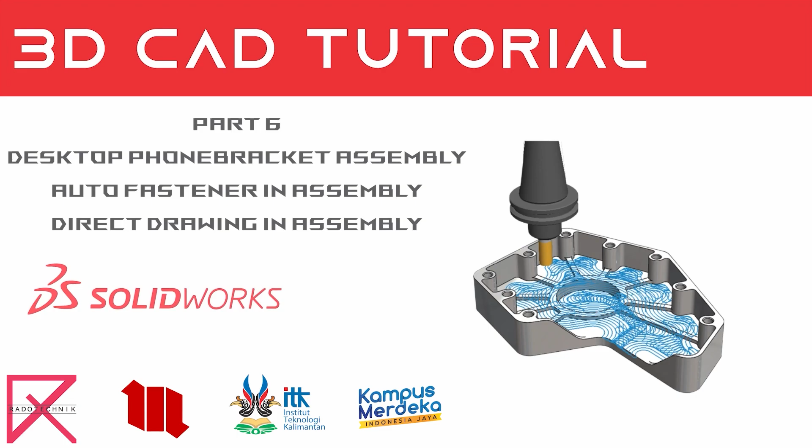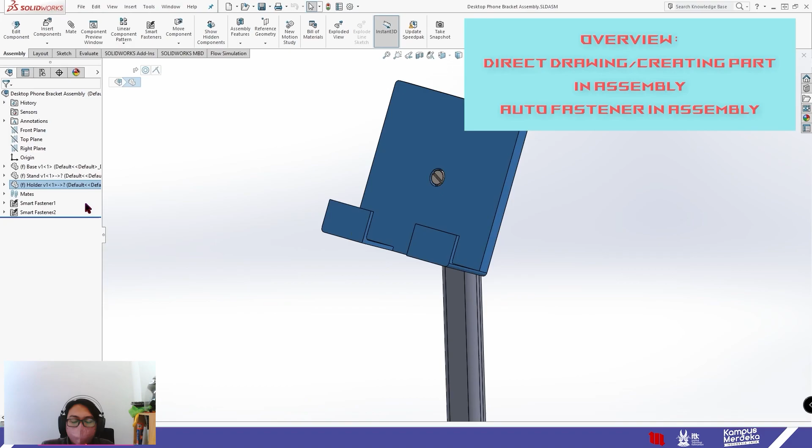Hello, this video is a continuation of our last part. We have created the base, and we need to create the last two parts: the stand here, and the holder on top. We add some bolts or screws using the fastener features—this is the top bolt or screw, and this is the bottom bolt or screw.

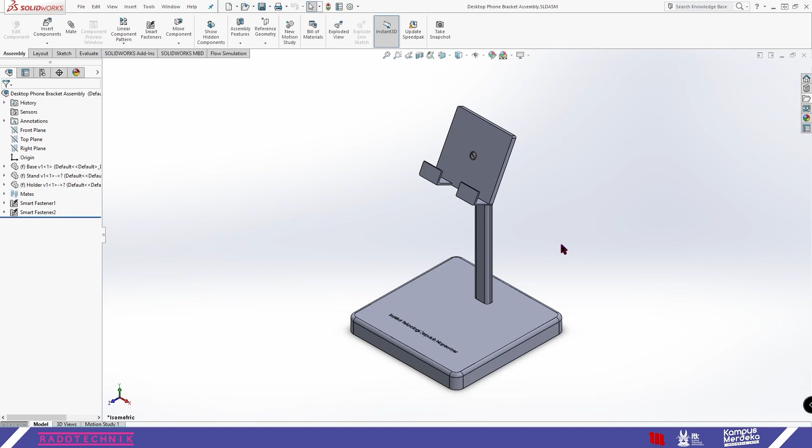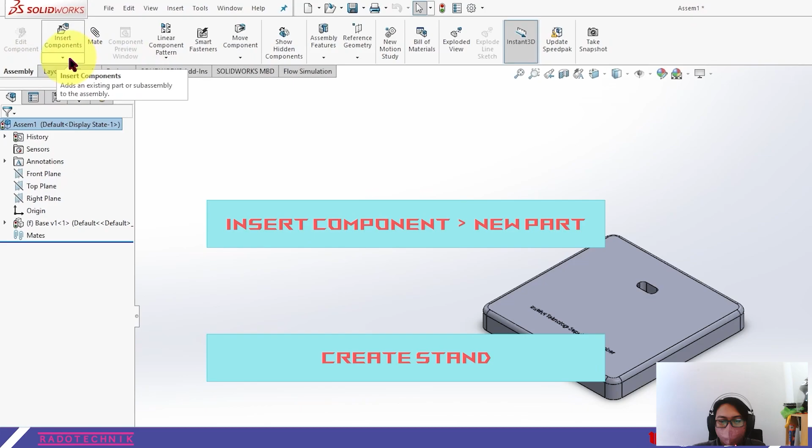Let's continue where we left off, starting with creating the stand that will be put in this slot. To create another part, go to the assembly and insert component menu, the same as before—we just need to create a new part.

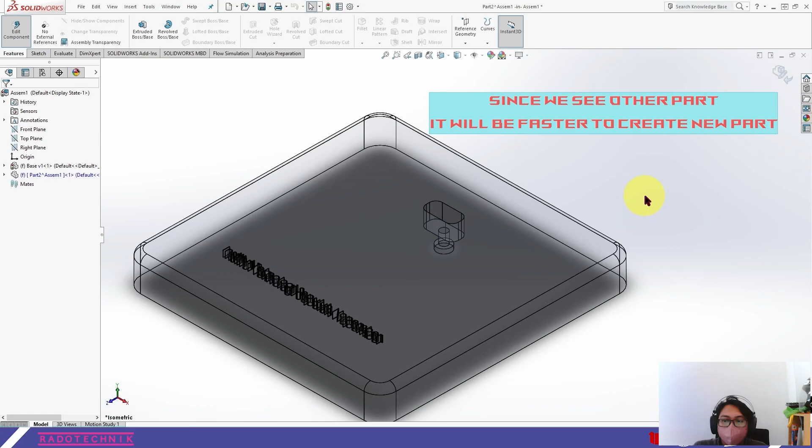Click it on the main window and then click edit component. Now since we've created a second part, the first part or the base will be grayed out. Since we know the exact location where we want to put our stand in this base, the dimension can be created much faster than if we create a new part by itself.

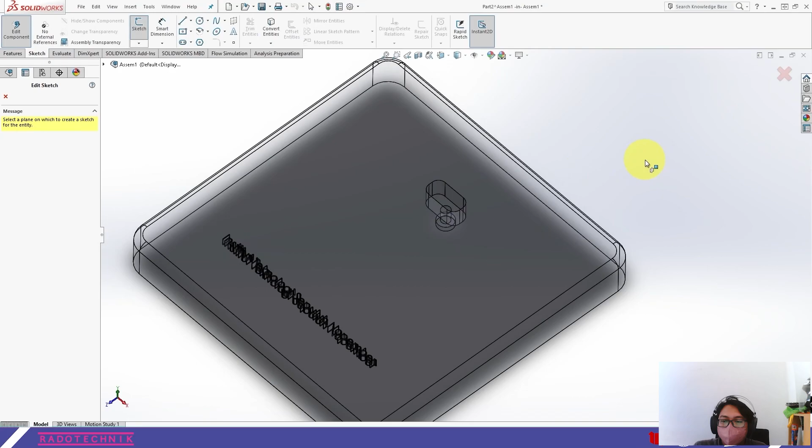Without further ado, let's head to the sketch menu and click sketch. In this sketch, we can use the base as a reference. We want to draw the stand in this area, so as a reference point, just click this area on the base.

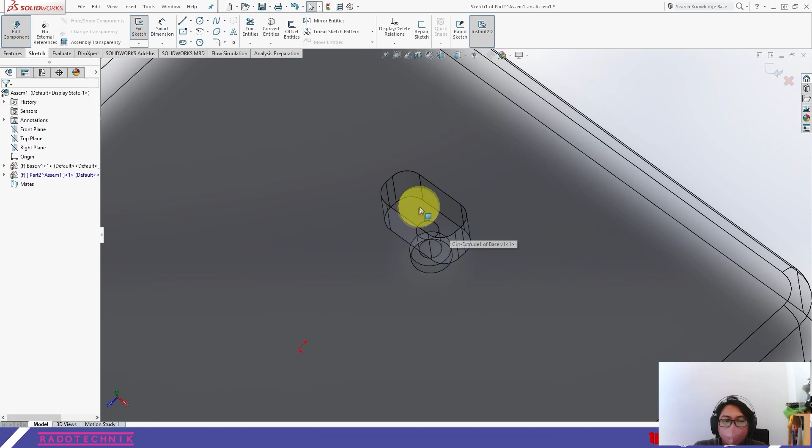Now we can create our stand by using the exact dimension of the base, simply by left clicking in this area. After the area turns blue, use convert entities in the sketch menu. It will convert the area of our selected blue region into a new set of lines for drawing.

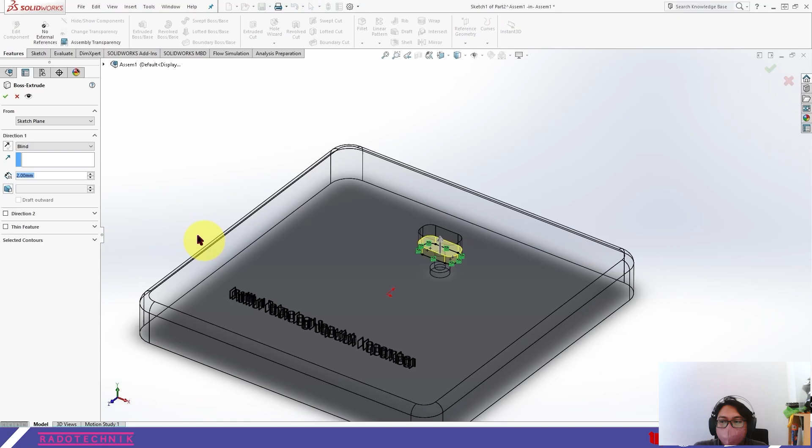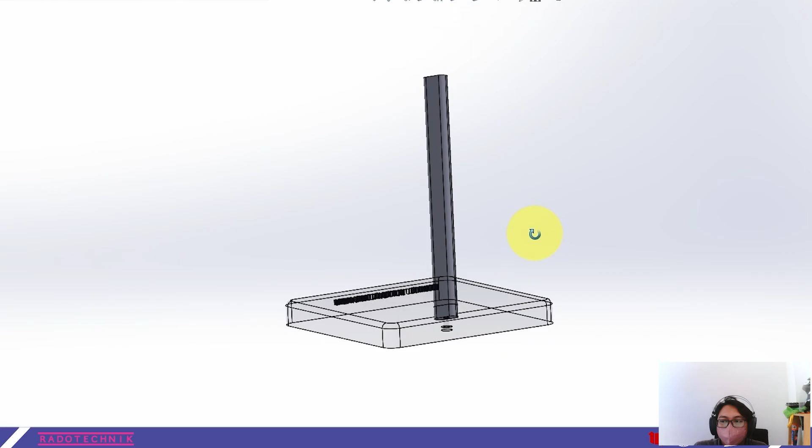Then head up to features and go to extrude, and fill out the dimension of extrude to 100 mil, or you can type 10 centimeters, and click OK. Now you have a base that will be put in this slot directly.

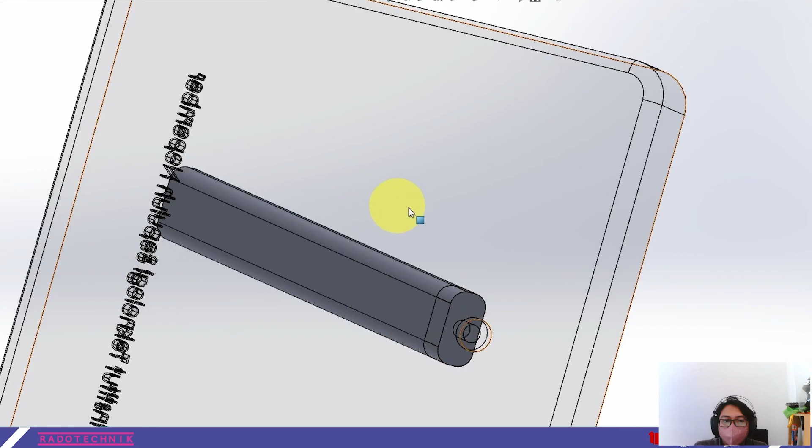Next, we want to create a hole and a thread for the bottom of the stand where the screw will be put in. To do that, we need to create a reference point where the hole will be placed.

Go to the sketch and click the bottom. After that, we can use a center line—select this center and this one. Don't forget to create the circle using the middle point.

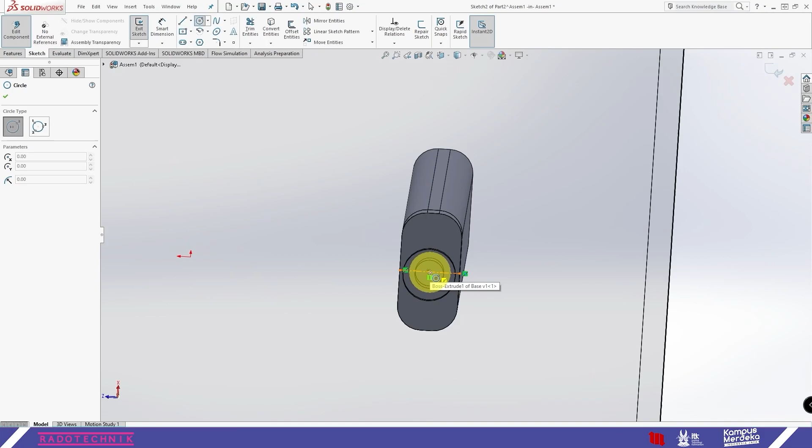I recommend you create a bigger circle and then use smart dimension to create a value of 2 mil for the hole.

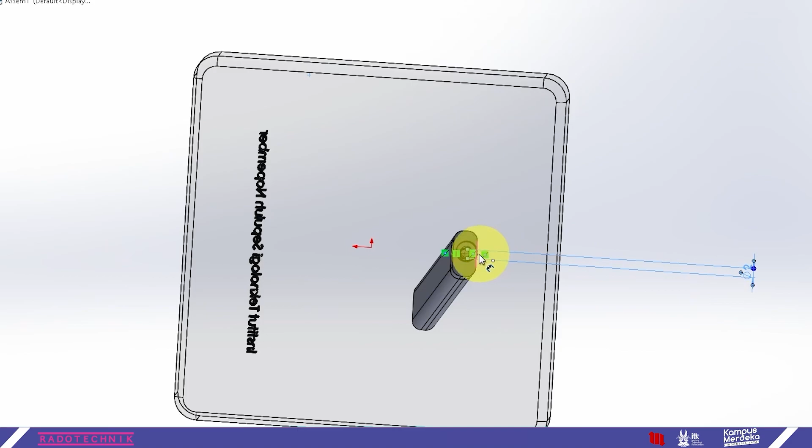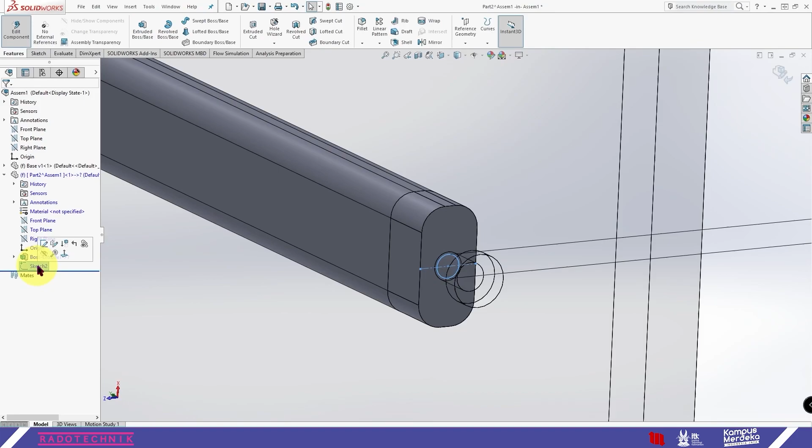After creating the circle, we need to create a hole for the thread. It's just a simple hole, so we can use the extrude cut menu. To do that, go to the tree and select the sketch of our hole, then go to features and extruded cut.

Now you want your hole to have a depth of 10 mil. Select OK. Now you have created the hole for the thread.

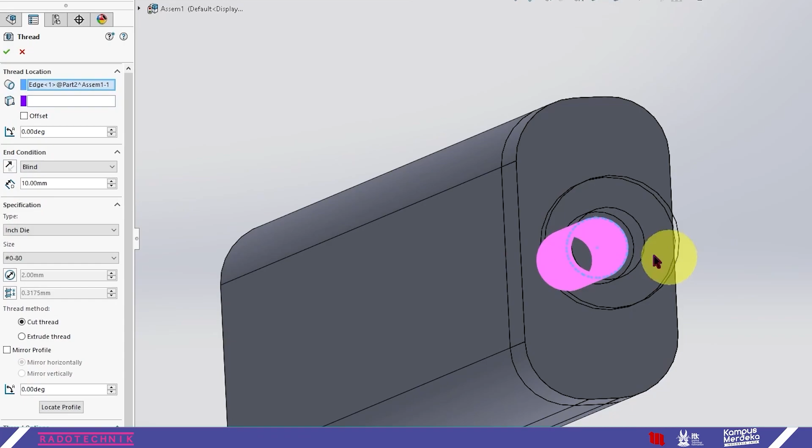Let's go to the hole wizard in features and select thread. Select the thread location here, and select the end condition to be 10 mil. The specification of the thread size is inch die.

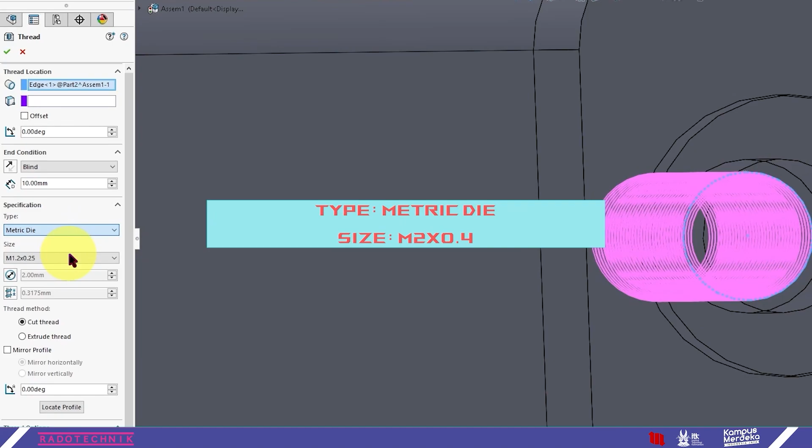For the size of the thread, you must select M2. The M2 is right here below the M2.7—it's the M2 by 0.4.

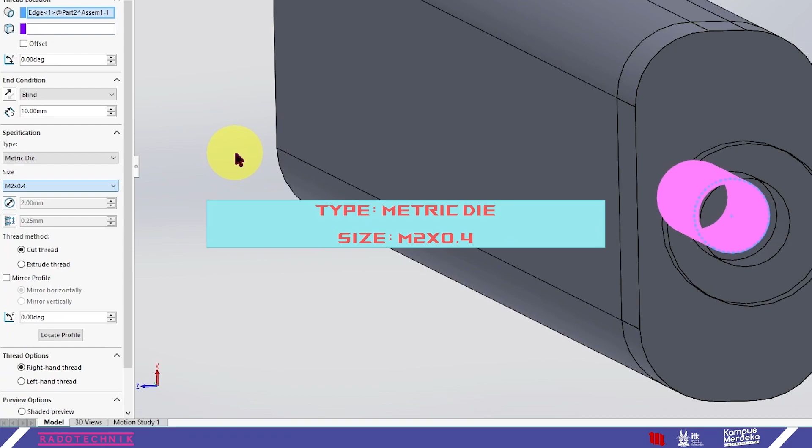You want to make it a cut thread, then click OK. Now you have created a thread for your hole.

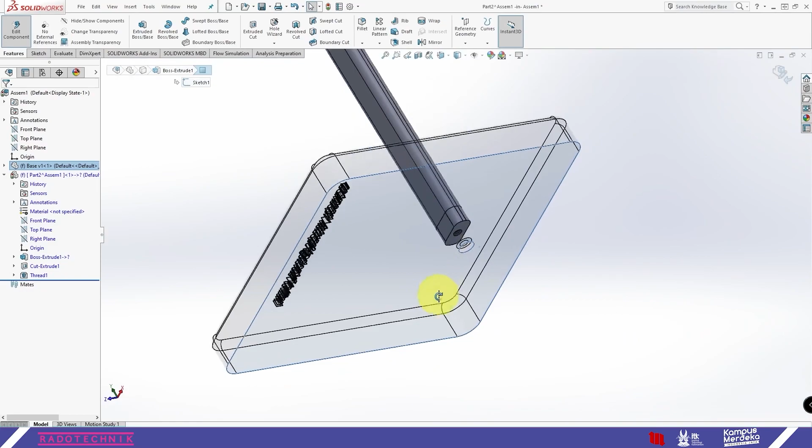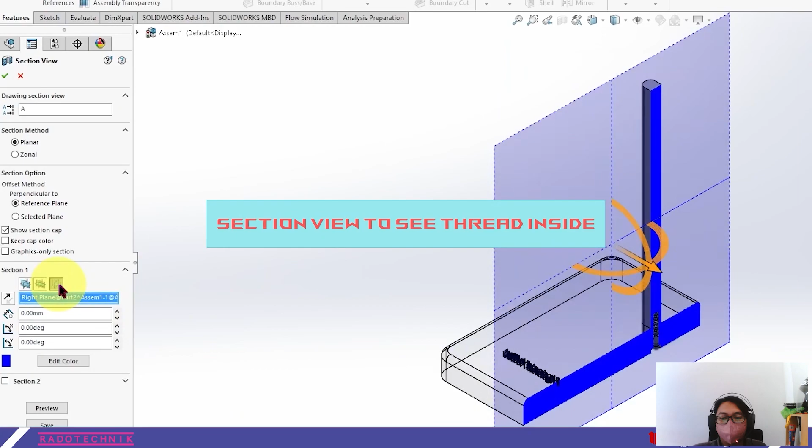If you want to see the thread, you can use section view from here, then select the right plane section view and click OK. Now, as we can see, we have successfully created a thread using the thread wizard.

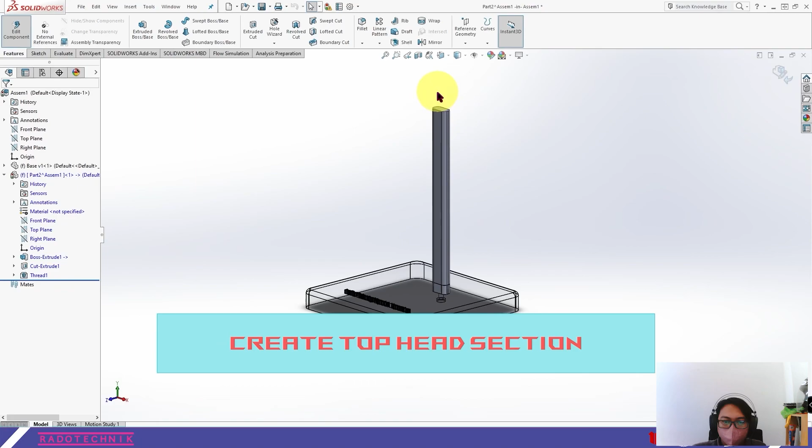The next step is to create the top head section where the base will be screwed in. To create this top head section, you want to click the tree on your part assembly tool.

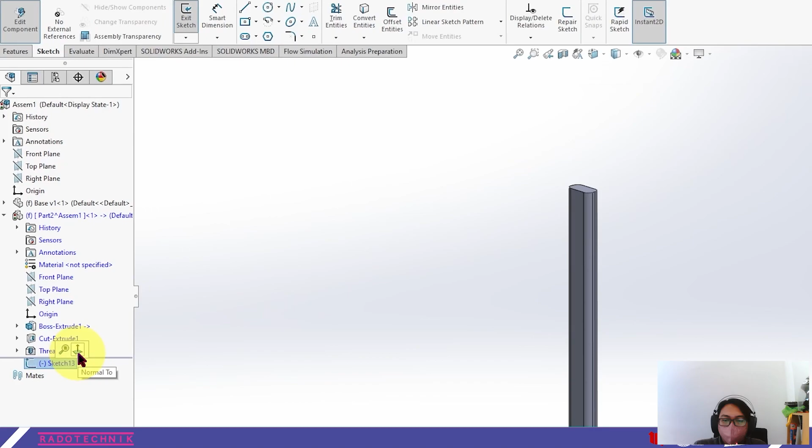Select the right plane—we want to draw a sketch in the right plane, so you can click sketch and select the right plane. Now the new sketch menu pop-up tree will appear, and select normal to make drawing easier.

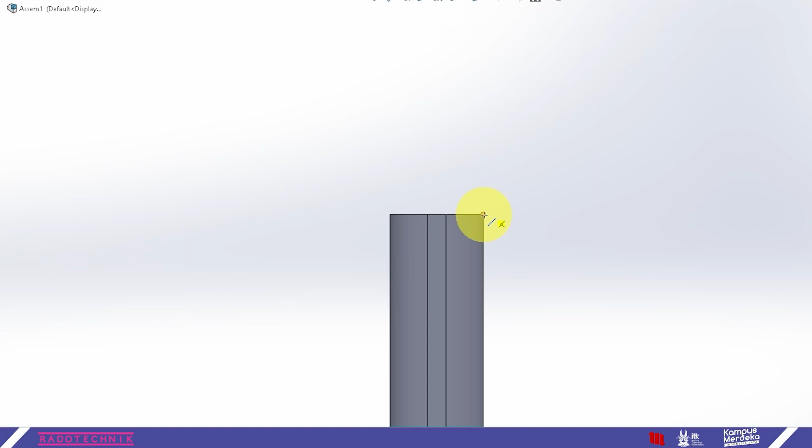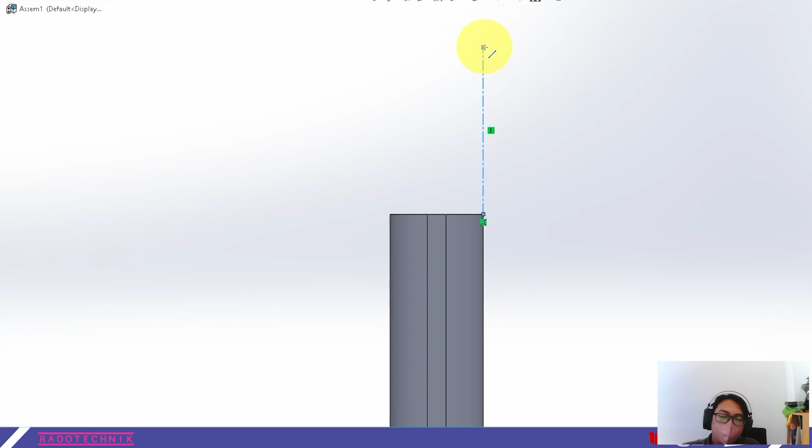Now create a help guide or center line from the corner on the right side. Click it, then go vertical to the top and give it a dimension of 5 mil.

After that, create another center line, the same as before, but going to the right or horizontal, then give it a dimension of 2 mils.

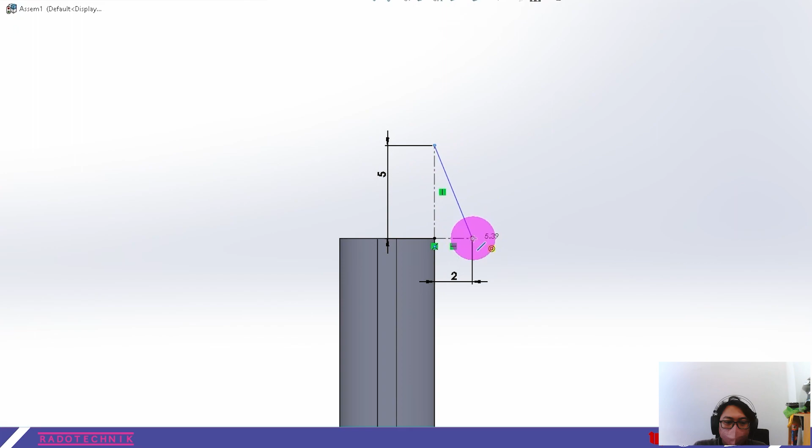Now draw a line from this top section to this section. Then go straight vertical to the bottom. Now you want to create dimension of 5 mil for this line.

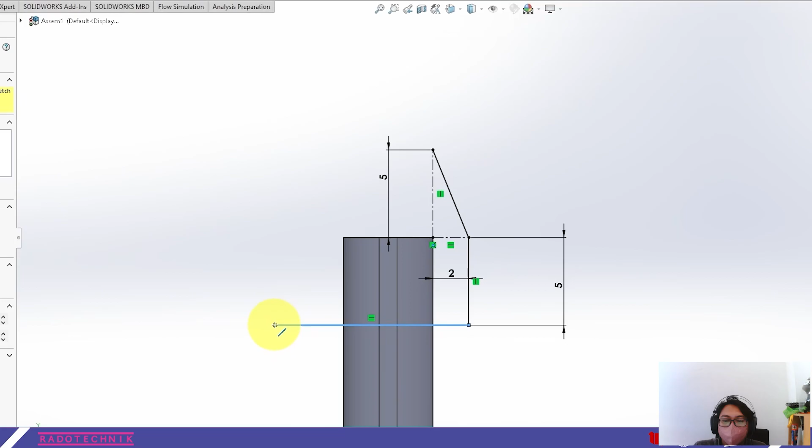Then draw a line from here to the left. Give it dimension of 12 mil.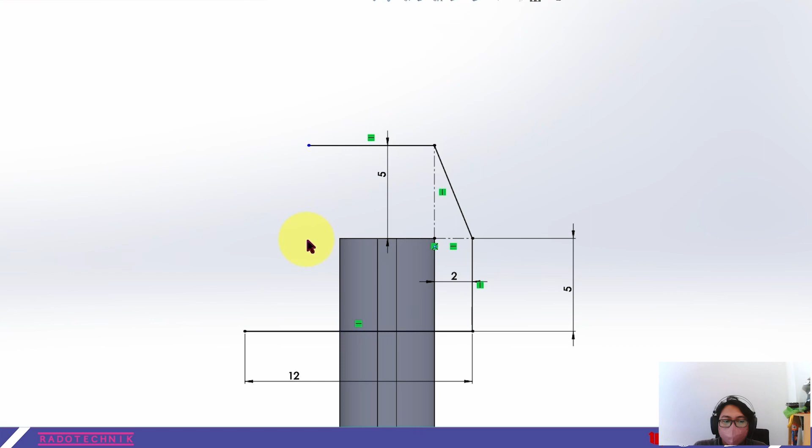Now draw another line from this top section to the left horizontally. Give it dimension of 5 mil.

And then the last part, you want to connect this dot to this dot. And then finish. Go to exit sketch, or you can directly go to features and extrude boss or base.

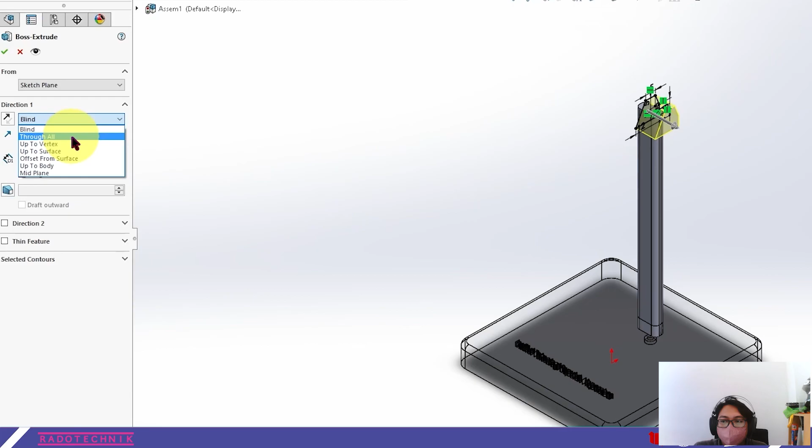Go to the isometric view, and in the pop-up boss extrude features, select direction 1 and mid plane. Now for this top part section, you want to fill in 12 mil.

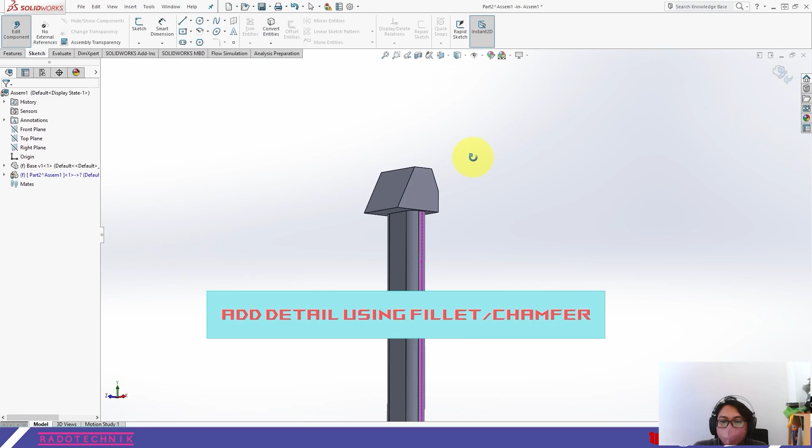Now maybe this new section is a little bit boxy. You can add some detail by using features and select fillet. Now you want to create a fillet for this corner, all 4 corners.

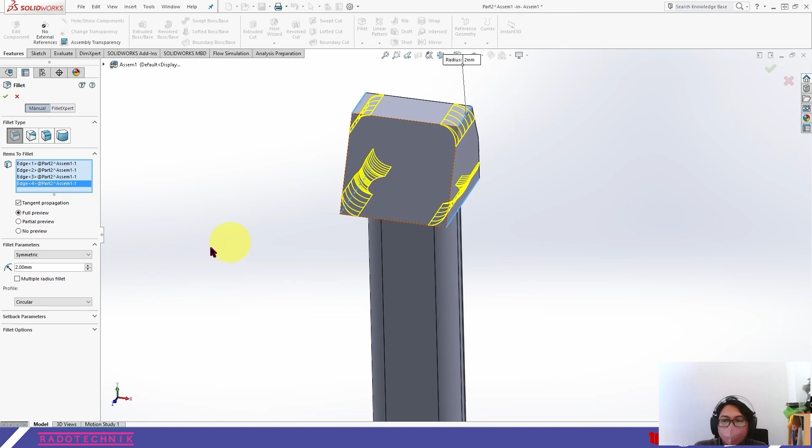You want to set the radius to 2 mil. So let's just do that. Now it looks a little bit better than before.

Next step is we want to create the same thread for a 2 mil screw on this face. To do that, we need to create the sketch on this face.

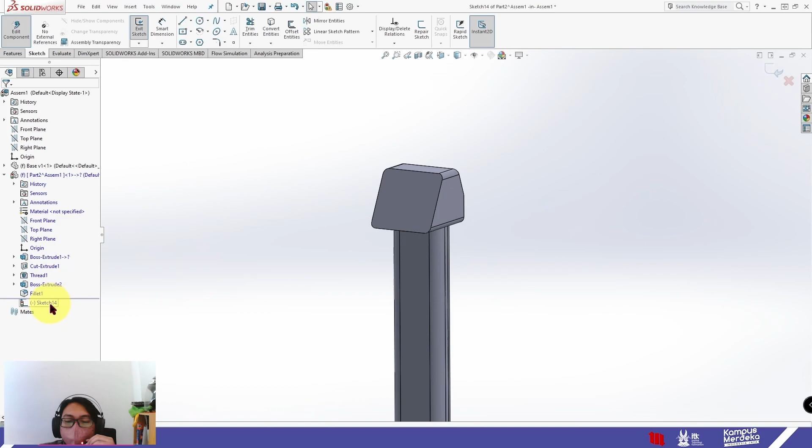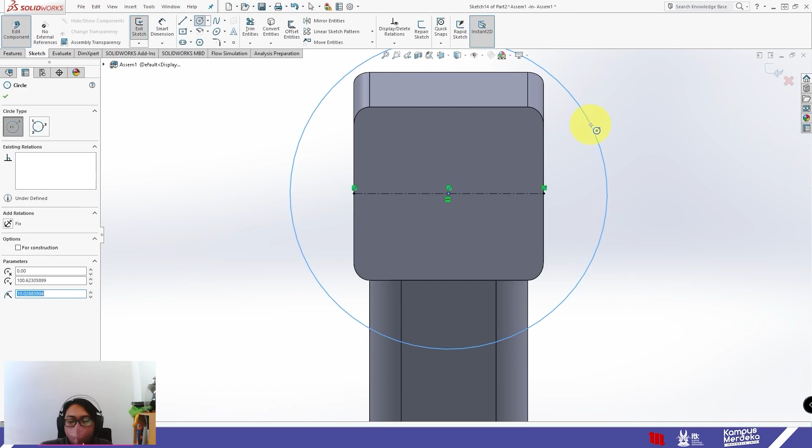To make it faster, we create a guide center line and go to the center. And then create a circle. Give it a dimension of 2 millimeters.

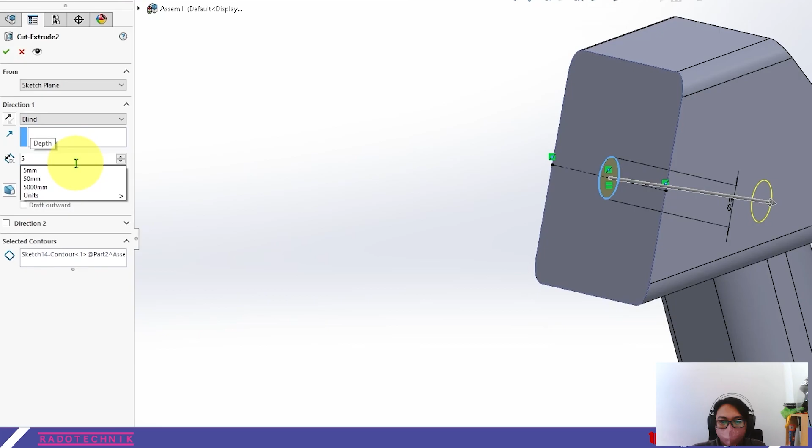Now we can go to the features and extrude cut and select the sketch. Then we want the depth of the hole to be 5 mil. So set 5 mil and then click OK.

And after that, we want to create a thread using features, hole wizard. Features, hole wizard, and select thread. Thread location, select this circle.

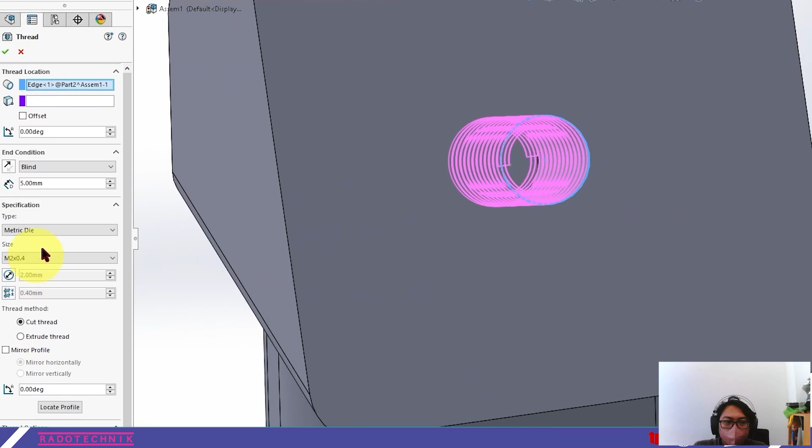And for end condition, we need to select 5mm depth. Specification metric die size M2 by 0.4, and for thread method we want extrude thread, and just click OK.

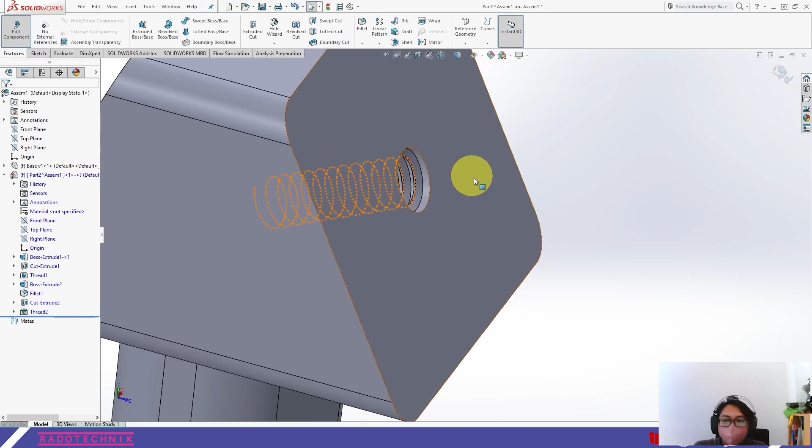Now we have created a new thread for our screw. Now basically we have created our stand, so we have two parts that have been made. The base part and the stand have been done.

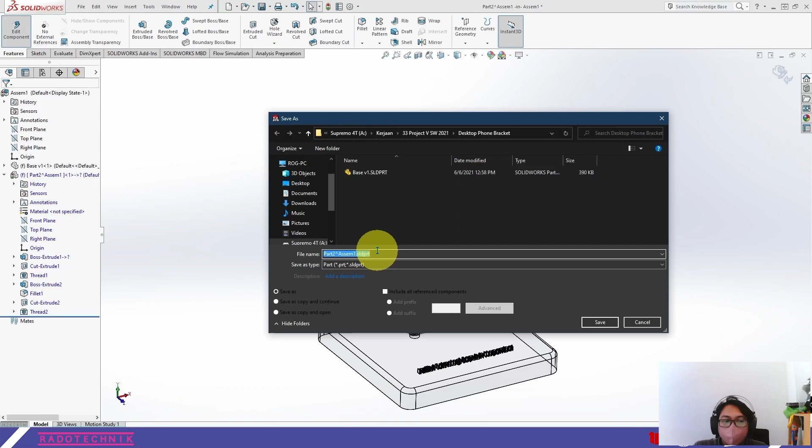What you need to do now is save the file and rename it to the stand. After the save, you can exit edit component.

Now we have two components already done. The last step is we need to create a stand for this base on the top. The same as before, we need to create a new part. So insert component and click new part.

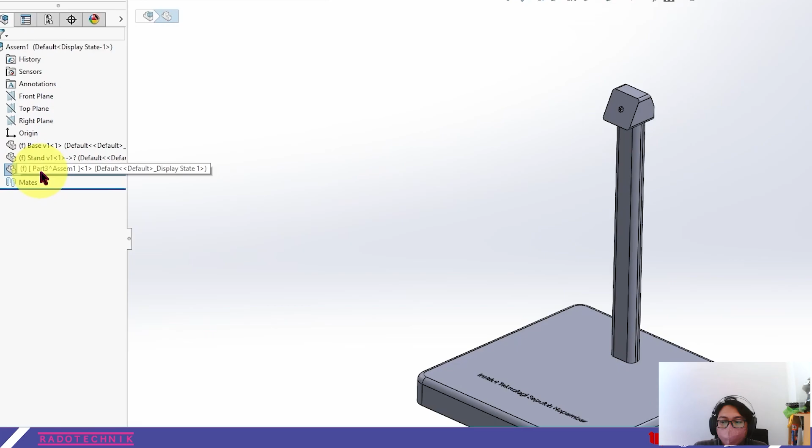Click once again in the main window. Your new part is already coded to the name part 3 assembly 1. So what we need to do is click this tree and edit the component.

Now what we want to do is sketching on this face. So go to sketch and click this face.

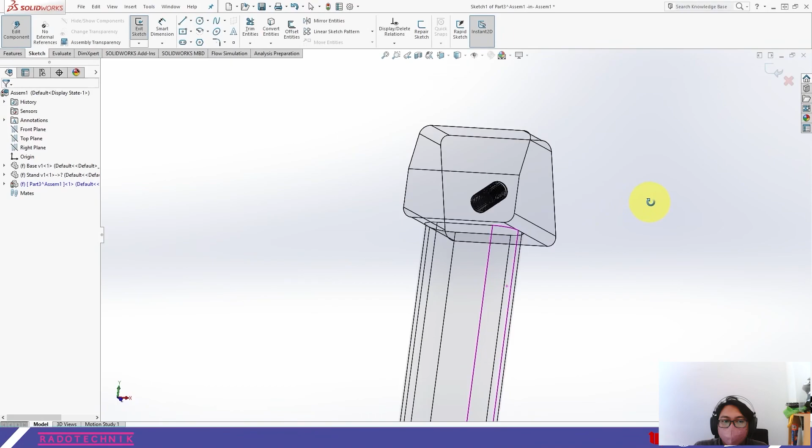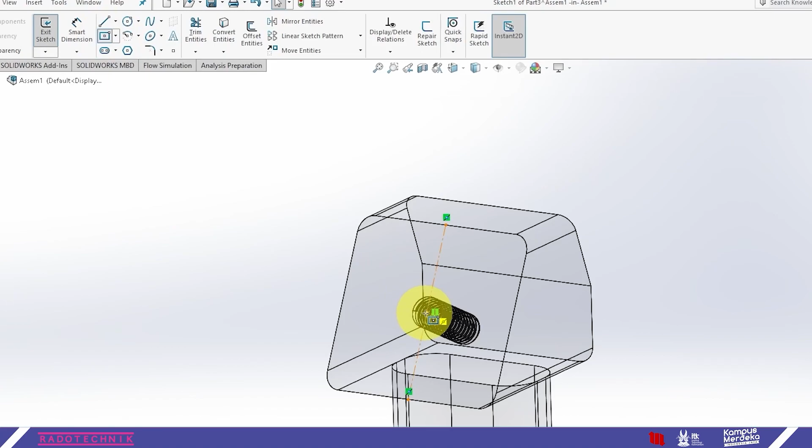After that we can do a center line to create a center. After you create a guideline in the center, you can choose center rectangle to create a square for the holder. Just create a square and give it a dimension of 40 mm by 40 mm.

It's just easy, go to features and extrude boss or base. In this dimension, set 3mm as the dimension. After you create this base plate or the holder, then you want to create the bottom holder.

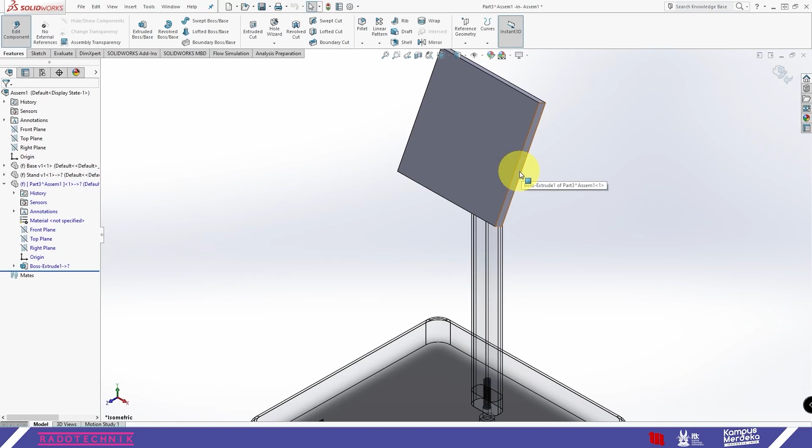To create the holder for the bottom, you want to sketch on the side of this part. So let's go click select sketch and click this side, or you can click this side. So you want to create a line that looks like this.

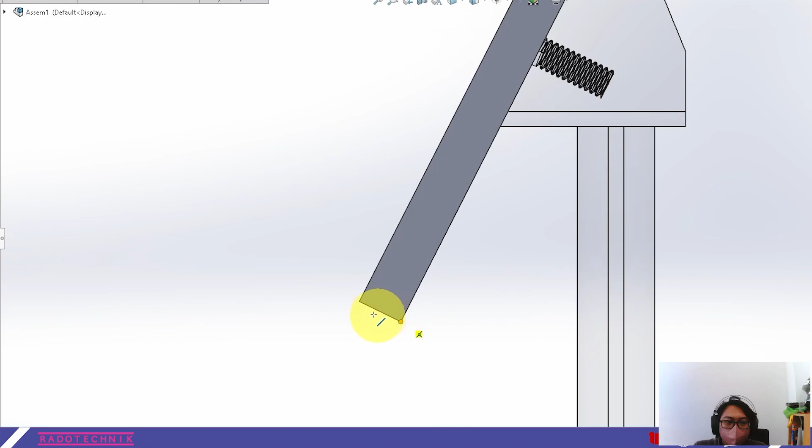Click here and here, then click here, click here, click here, click here, click here, and finish. So it's basically an L shape. Then you want to do the dimension.

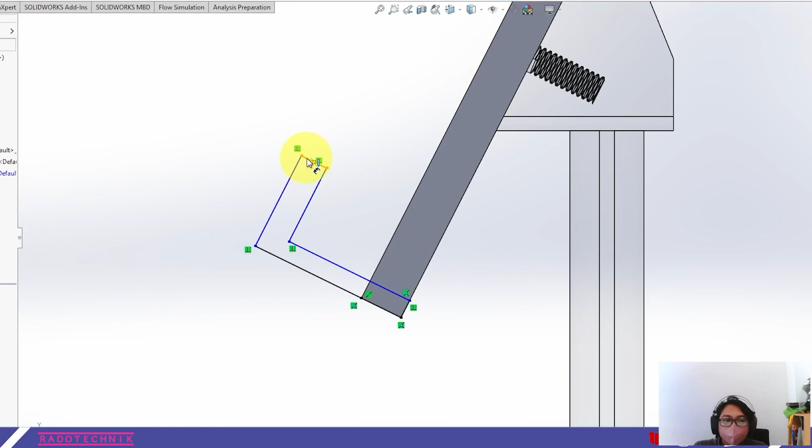You want this part to be 1 mm, and this part. When you create a smart dimension, this dimension and this dimension are completely different. As you can see, this is 8 mm and this is 7 mm.

We want to edit this dimension to 12 mm, and then to create a thickness for this area, you need to click twice first, and twice

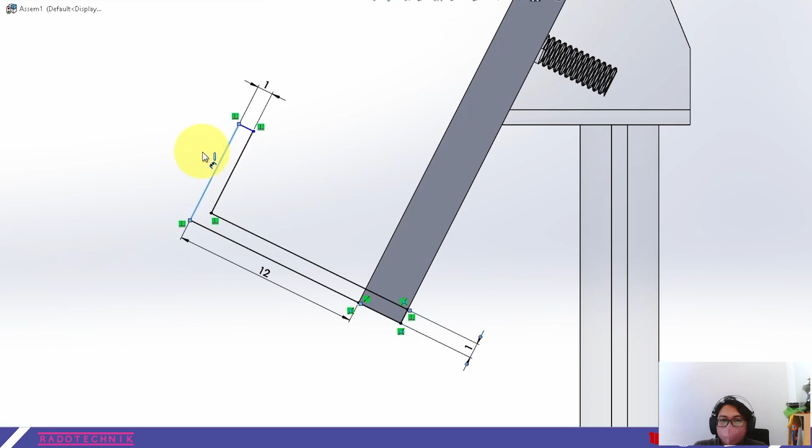to be 1 mil. And then this one to be 8 mil. Then extrude.

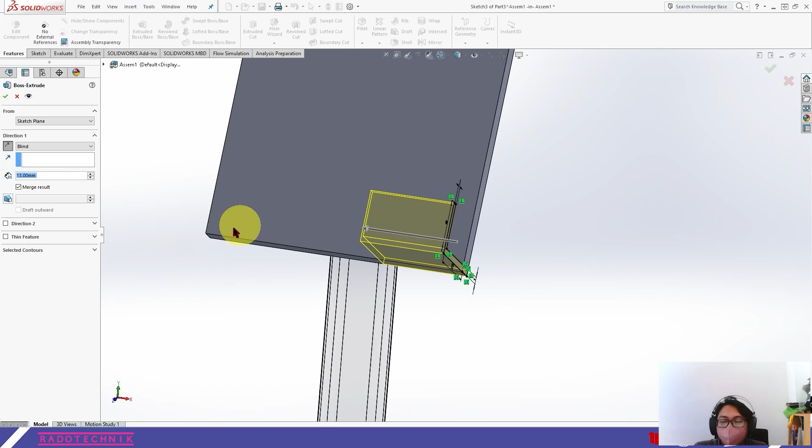Change the direction by clicking this reverse direction. Then set this value to be 13 mil.

Now that you have created this side, we need to mirror and create this side. To do the mirror, go to the features and select linear pattern. Click this triangle and click mirror.

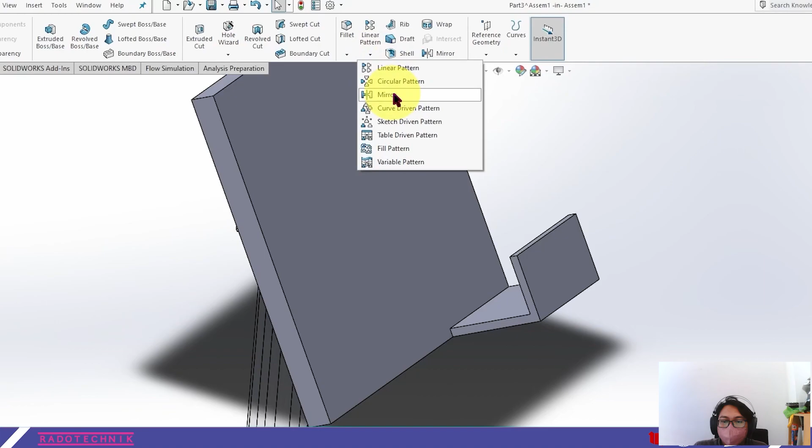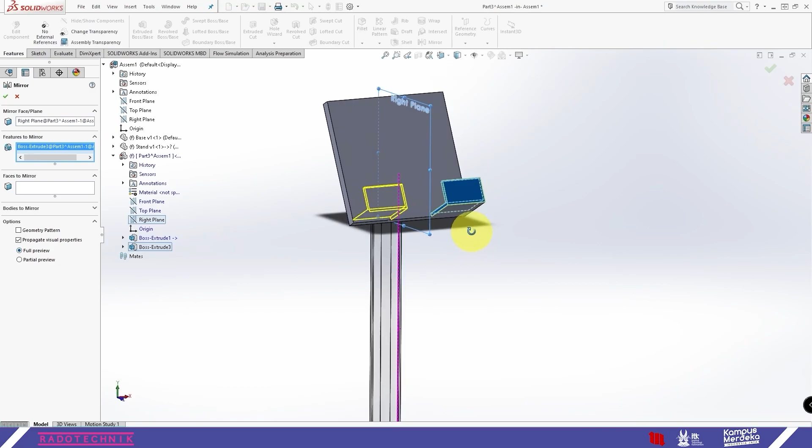First, we need to select the mirror face or plane. Select a plane from this second tree and select part 3. The mirror plane we want is the right plane mirror, so click. The feature we want to mirror is the boss extrude, so click. If you do it right, this yellow area will show. Now you have to create a symmetry base.

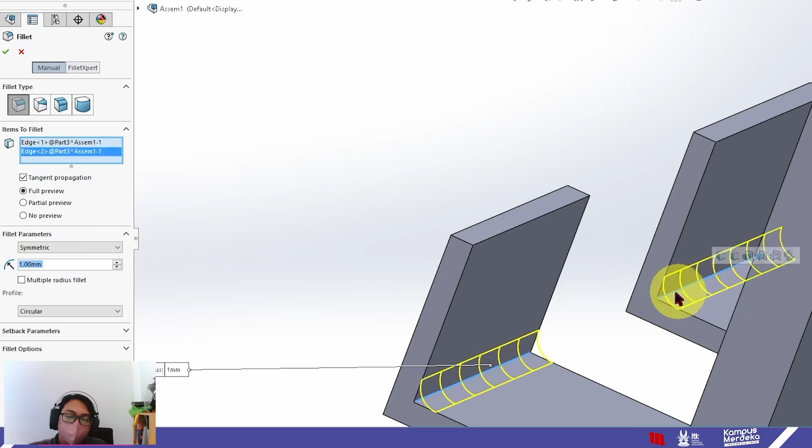After that, we can create some detail by using fillet. So let's do that. Create a fillet using the fillet tool. Select this one and also this one. Set it to fillet radius of 1 mil, then select OK.

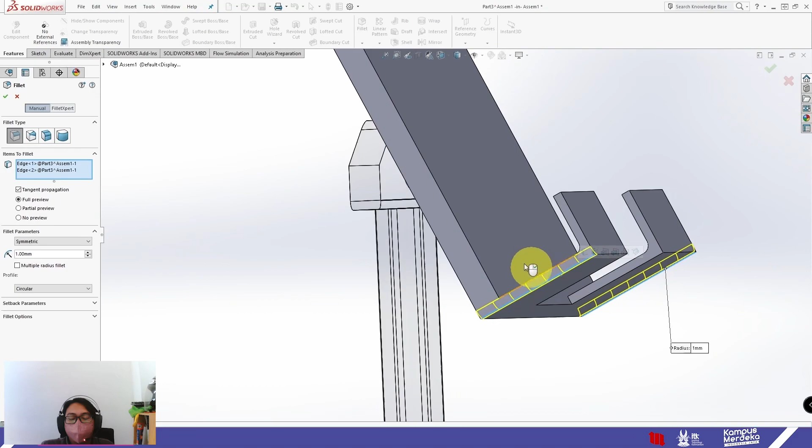After that, we can edit more fillet. This time, select all 4 sides, and click OK. Now the design looks a little bit better than before.

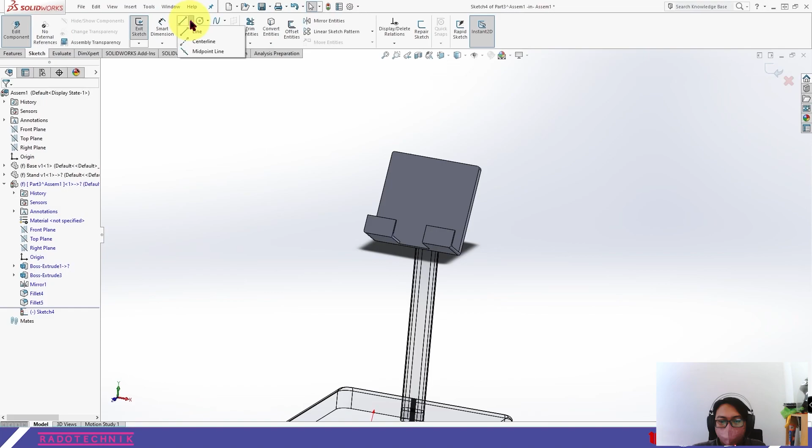So the last steps, we need to create the center hole for our M2 screw or M2 bolt. To create that, we need to do reference design point in the front face. Go to the sketch, select the front, and create a center line to help you as a guide. Just go for the center. And then create a circle in the center.

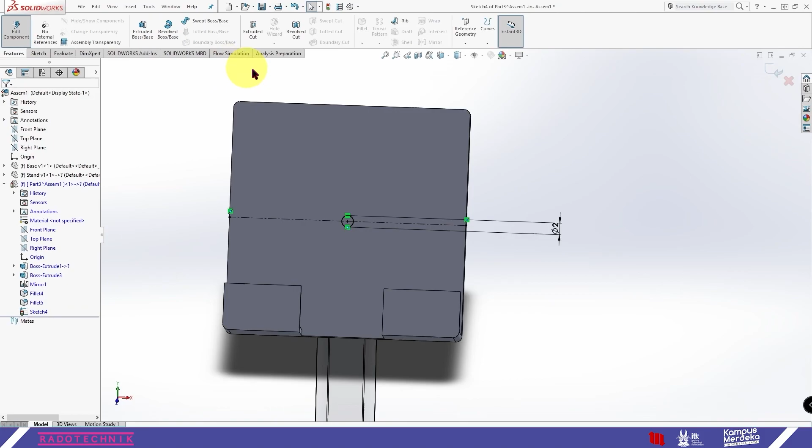Give it a dimension of 2 mil. After that, just exit the sketch. Now we need to set a hole wizard.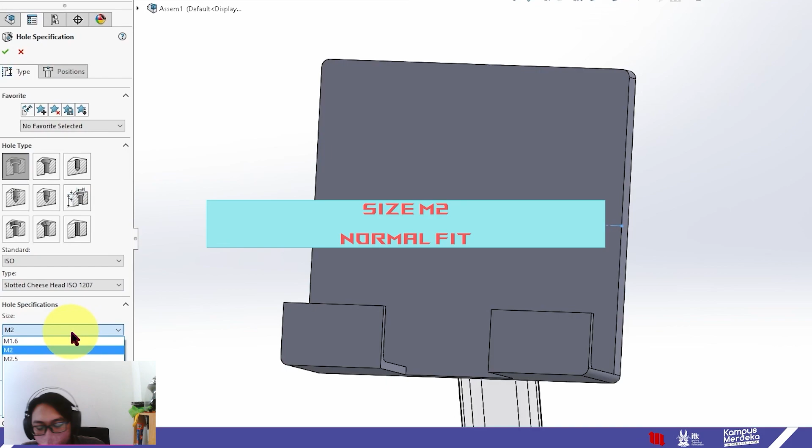Select counterbore, standard ISO, slotted cheese head ISO 1207. The hole size is M2 normal fitting. Then for the position, select 3D sketch and select it on the center. Then click OK, and it automatically creates the holes for you.

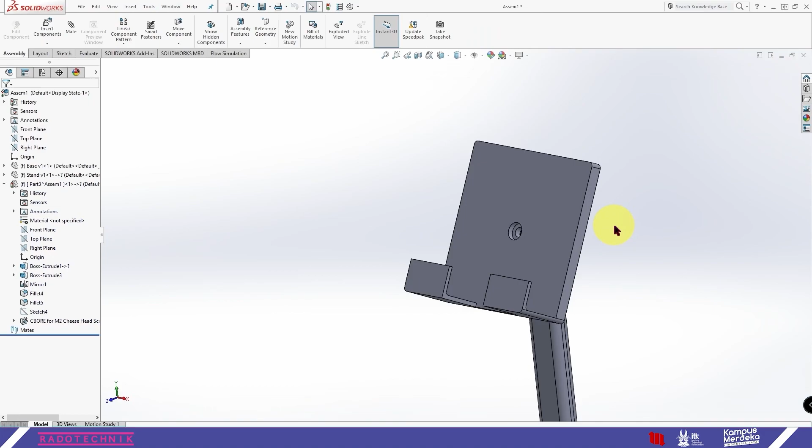After that, we can hide this circle and reference geometry by using sketch and hide. Then we can exit edit component. Now we have created a full desktop stand for smartphone. You can go edit part, that last base, and save it.

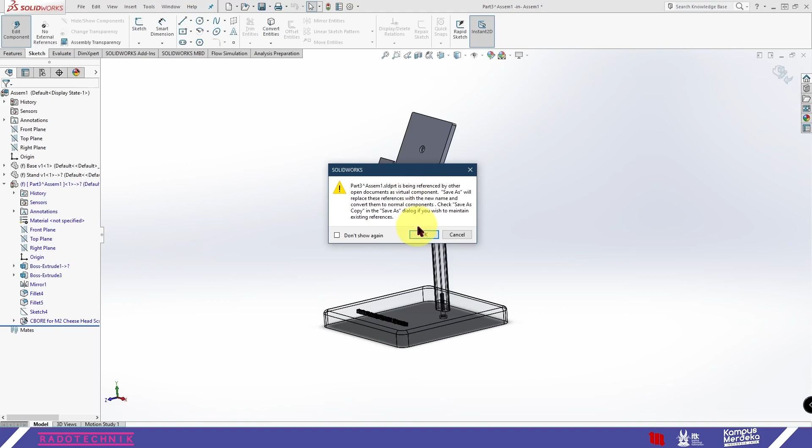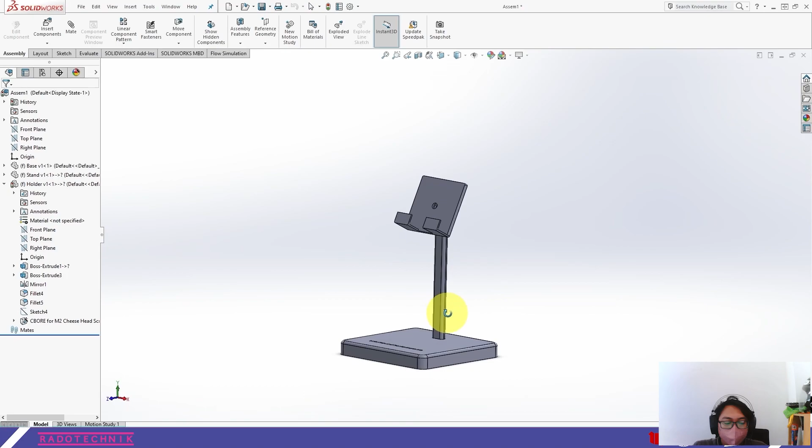So you have basically created these 3 parts, and created a hole for the fastener. There is a faster way to create a fastener by using assembly and smart fasteners.

So let's do that. Go to the smart fastener. Then maybe some pop-up warning or error will show in the windows. It says: error, smart fasteners require SolidWorks toolbox, which is not present.

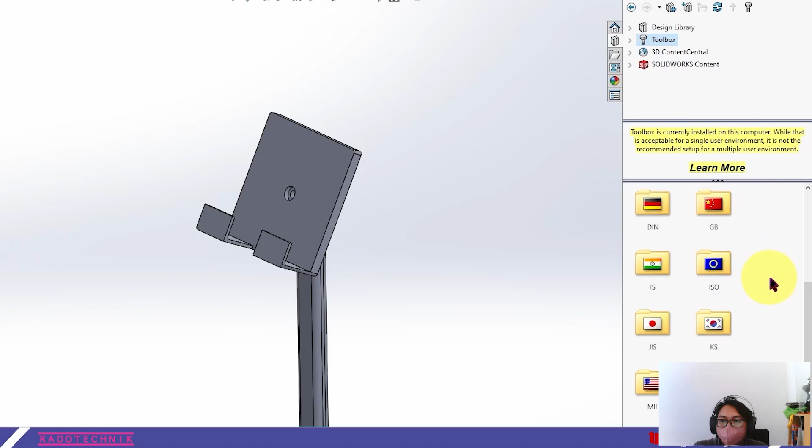To fix that, go to this menu. Go to Design Library and click Toolbox. Click Add-in now. After some files loaded, get back to the Smart Fastener, and click Yes.

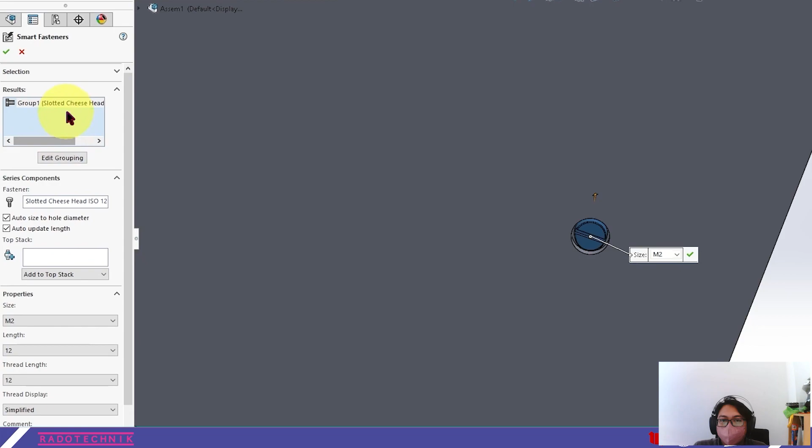Now we can select these holes on the base and click Add. And then we have automatically created a bolt or screw.

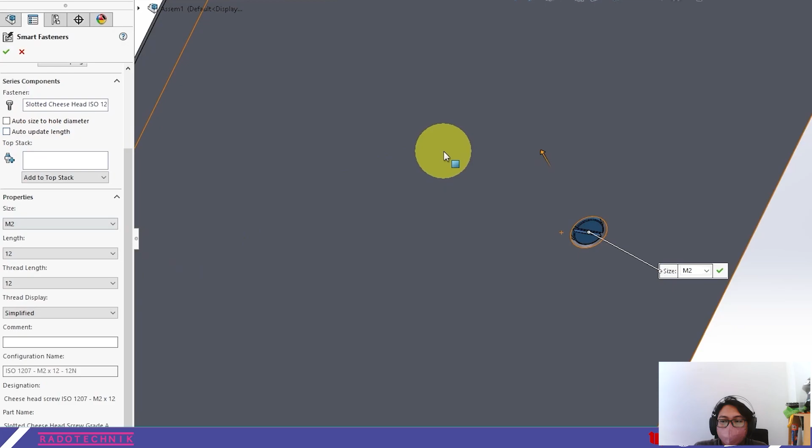We can edit the bolt, but first let's unclick the auto size and auto update length. So it will automatically create an M2 bolt with the length of 12 and the thread length of 12 mm.

If you have a low spec PC or laptop, just use simplified thread display. For this purpose, I will use schematic thread display. After that, click OK. And the last part, we need to create this section of fastener.

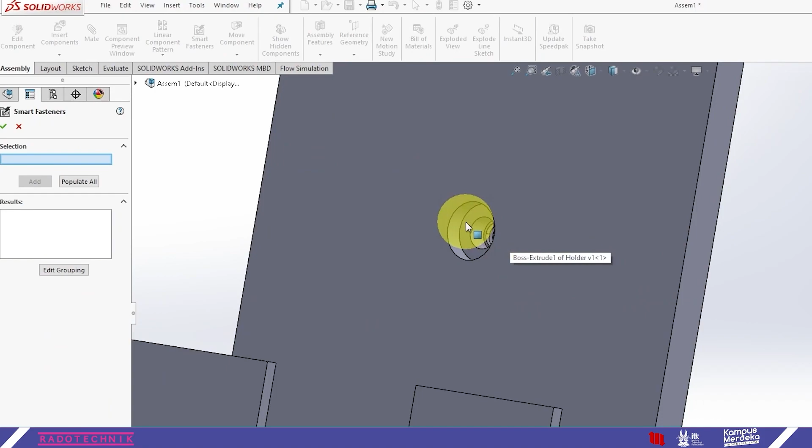So click Smart Fastener and select this space and add. Now it automatically creates the same type.

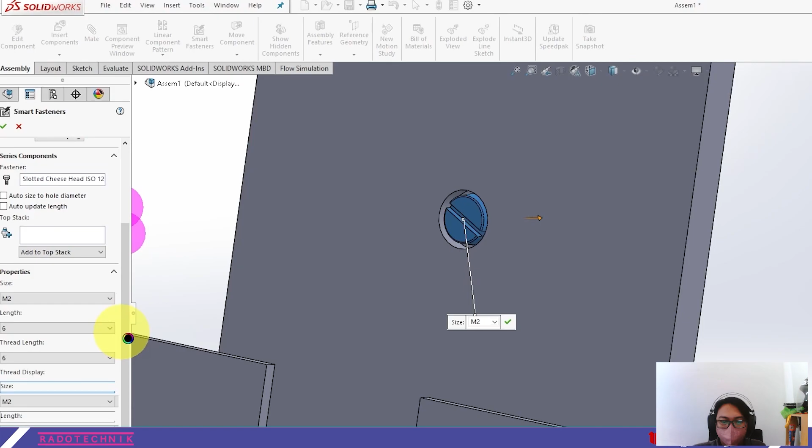I just need to unclick this thing if I want to edit it, and select schematic thread display, and click OK.

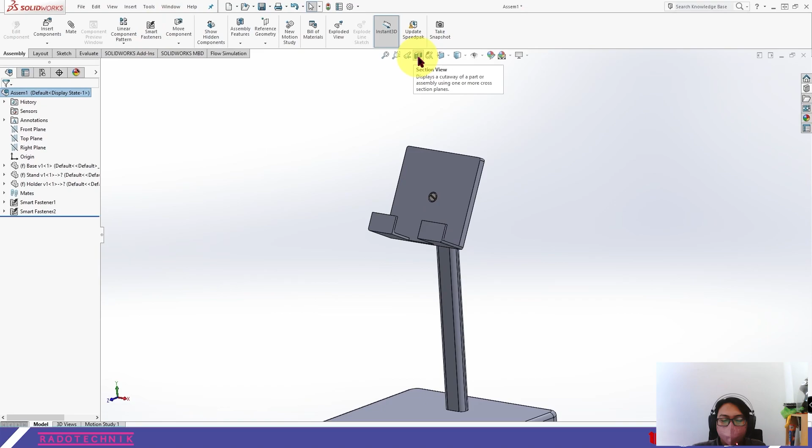Now I've created a complete assembly, and some of it is automatically completed by the help of Smart Fastener. Let's see the section view so we can see the thread and the bolt. So this is the thread that we created, and this is the bolt that was automatically created by SolidWorks. Same as here.

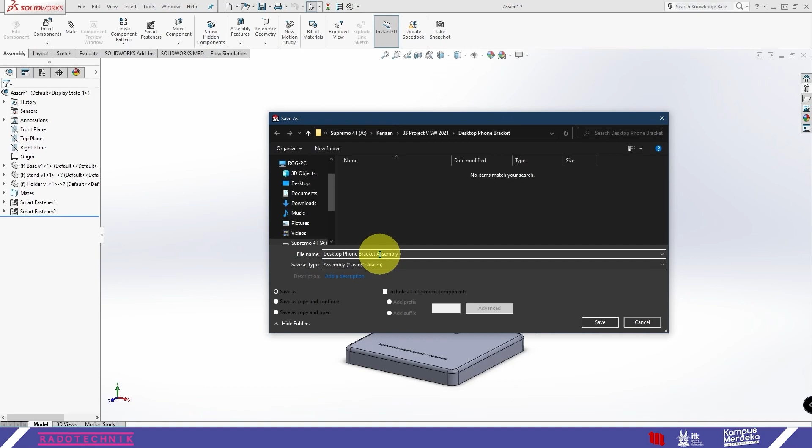The last thing we need to do is to save the file as an assembly. Just name it desktop phone bracket assembly. And now we have created a fully assembly of phone bracket.

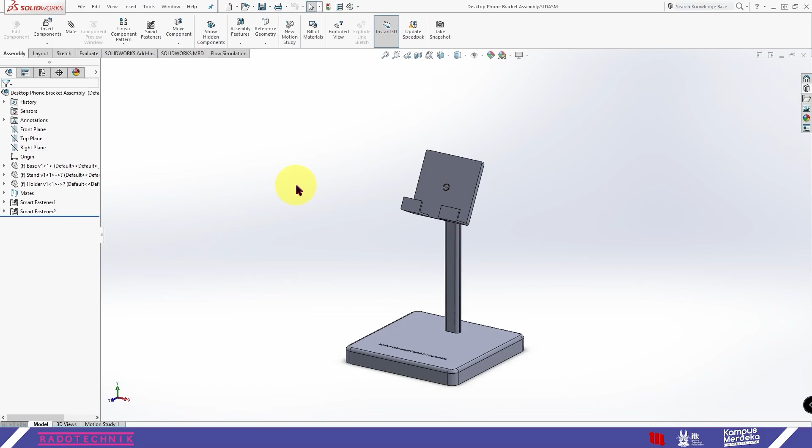And that's it. What we've done has basically covered almost all the training theory. There's some additional features that will be covered in the next video. So thanks, and see you in the next video.